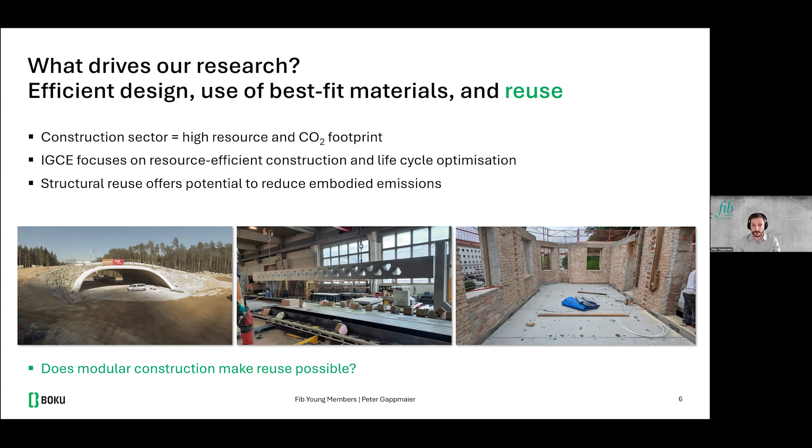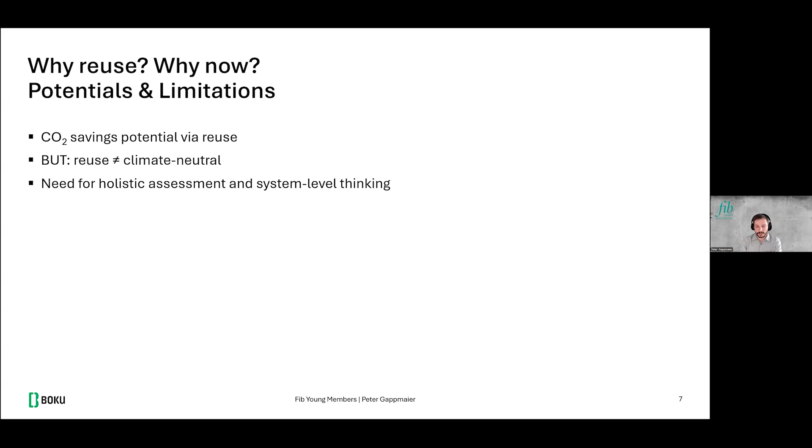And why did we come up with this idea? Since we had a survey going on and also an LCA on different ceiling slab systems, columns, and floor systems. And there we found that reuse potential is super high compared with recycling. So the GWP goes way further down if you reuse building components. But you have to say, it's not climate neutral. You can't compare, you will never get this.

So there are a lot of topics we can address. So also CO2 storage will be a thing, since also if you reuse, you already need a certain amount of new concrete to fix stuff, etc. But that's something that maybe can also be solved.

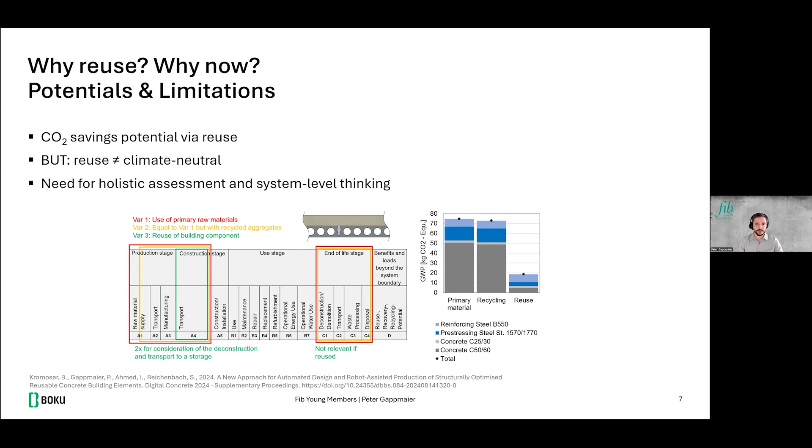But as you can see here, the potential is kind of huge, I would say. And that said, it needs a holistic analysis of all building components and the construction industry. So therefore, we had a survey going on with 7 stakeholders where they were asked up to 35 questions.

And we had over 100 participants, as you can see here, from manufacturers up to architects to demolition companies, etc. The topics have been about quality of construction components, flexibility, sustainability, logistics, connection types, reuse potential, etc.

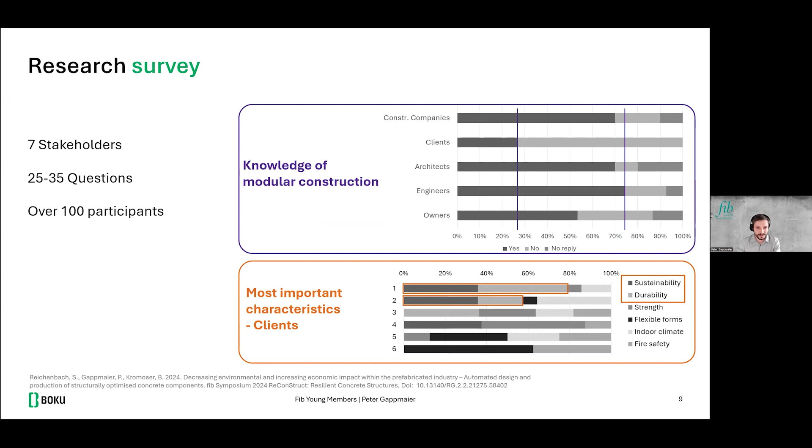And there were some interesting outputs. The knowledge of modular construction was kind of okay or high, I would say. But clients, yeah, how should they? They weren't aware of it. But on the other hand, clients' first and second ranking was sustainability and durability of the building stock. So it's not something only we are doing in research. Clients also want this to happen.

For the drawbacks of reuse, you might think architects would say the design limitation could be there, they could be angry about it, but no, they also said logistics effort. And as we then had conversations with them, they told us, sometimes you need some boundary conditions you can work within, and then you sometimes get more creative if you have certain boundary conditions.

And so they said, and also demolition companies, that screw connections would be the best for them because it's more simple to rebuild the building and build up the building. Even if the building is not 100% reusable, as you've seen the potential beforehand, it's also probably worth it to have a certain amount of building components reusable.

So our tasks, I would like to show you more from my personal work: how we produce them, how we can automate them, since automation is super lacking in the construction industry, especially from my point of view, what I've seen in Central Europe more or less, and resource saving on several levels. So we can save a lot in the design at least, and also have the automation potential for the labor shortage, the maintenance, etc.

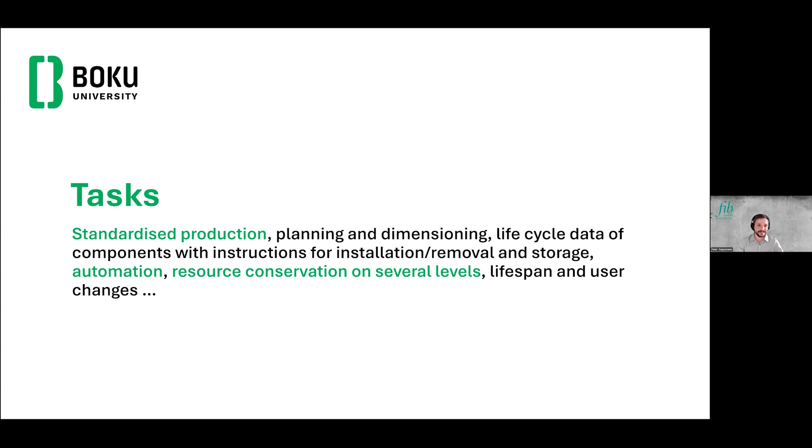You can just produce more stable, and also for your health. Don't know how many of you have been in prefab construction companies and working there. Yeah, it's not that easy, I would say, doing this over several years.

So that's why I came up with the idea of a manufacturing execution system where we use robots to produce these components. But by just producing these components, as we have seen from the survey, logistics will be affecting these components. So that all has to be gathered together in a database where it can be stored.

And this is something very important: to maintain these databases, the information of your products. If they're reused, you can pass them to the next building. Since if you lose this data, this information of these components, we are at the point where we are now. People could reuse certain components, but since they don't know what material it is, what steel is in there, who produced it, sometimes this data gets lost, and so they are not capable of reusing them. And getting this data from already existing older components is very hard. So this is a certain point.

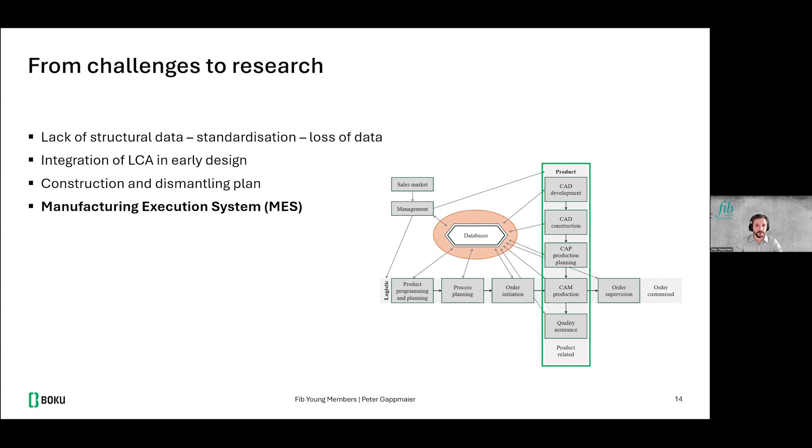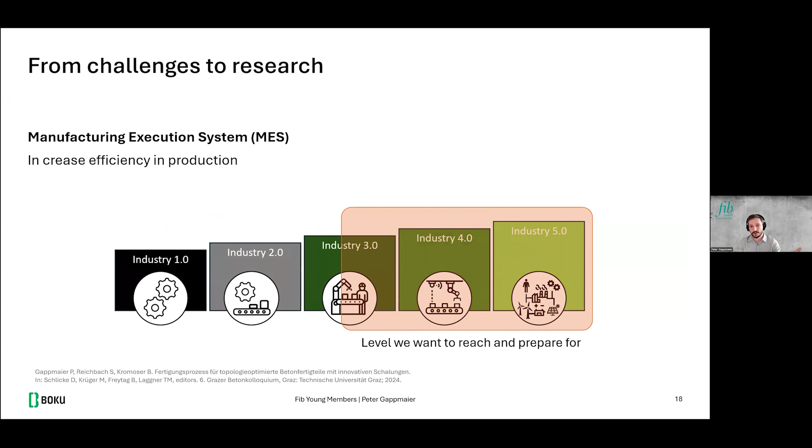That's why we think of the actual state of practice. We would like to have a system that goes up to Industry 4.0 and 5.0, or at least be ready to have no boundary conditions that are not applicable for Industry 5.0. So for prefab, you have several stages with a formwork table that goes through standard shuttering, individual shuttering, placing reinforcement, concreting, you name it. And we would like to combine all these steps, doing this task with one robot in a production cell. So it's like a modular production cell.

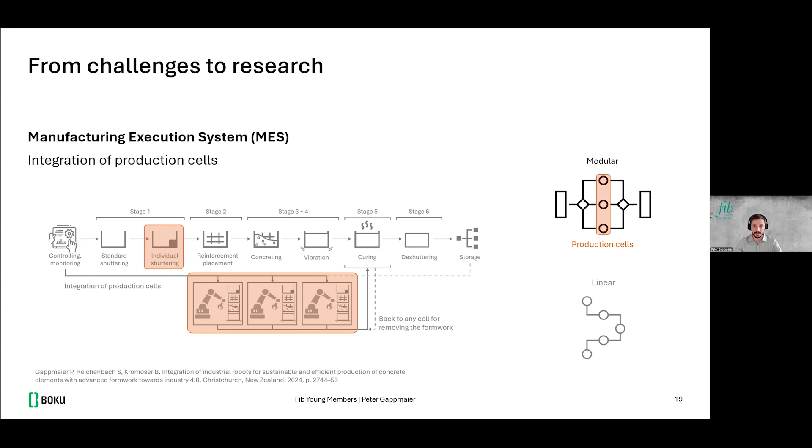Each robot has its own cell where you produce your components, and afterwards they go in the curing chamber and can be de-shuttered in any other production cell. So it's also way easier for maintenance, it's plannable, and since we have a full digital production chain, you can also simulate this and have a nicer process overall. It's more effective, productivity would increase. This is compared to a linear process where you have bottlenecks, and if something goes badly, the whole production just stands still.

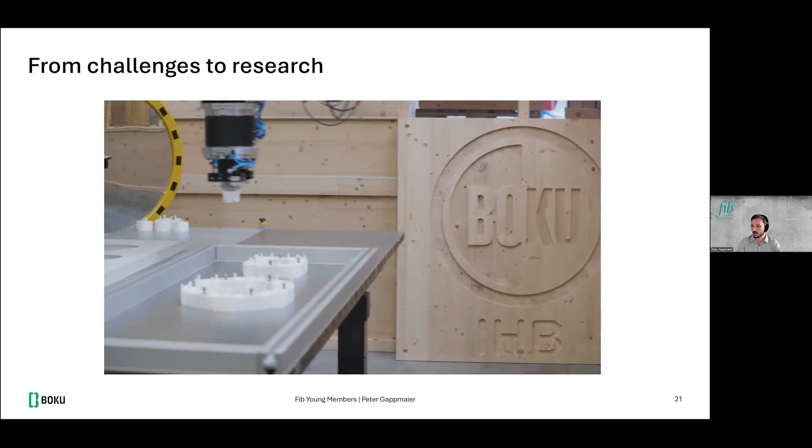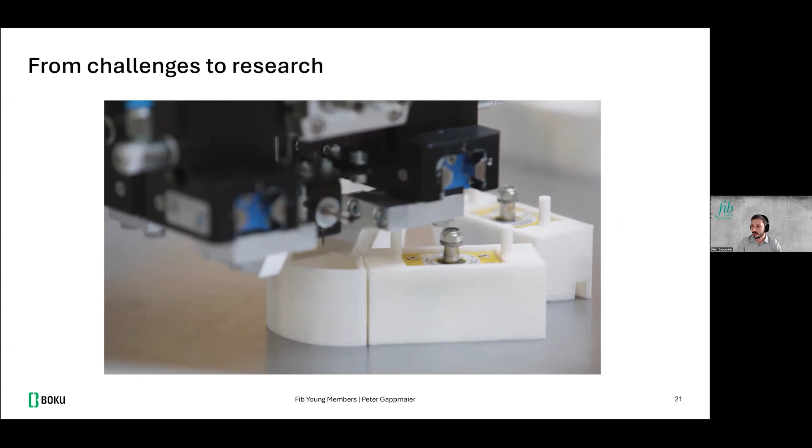Here are some insights from my tests I was doing with our robot, with my formwork system. As you can see here, it's fully automated at the moment. The first tests are going up. And in the end, I show you a bit of an older video, but you see how this formwork system is performing. In the back, you can see an already cast concrete beam. And on the next slide, I can show you how we scaled it up to an 8-meter full cast beam that will also be implemented this year, hopefully, in our new robot lab.

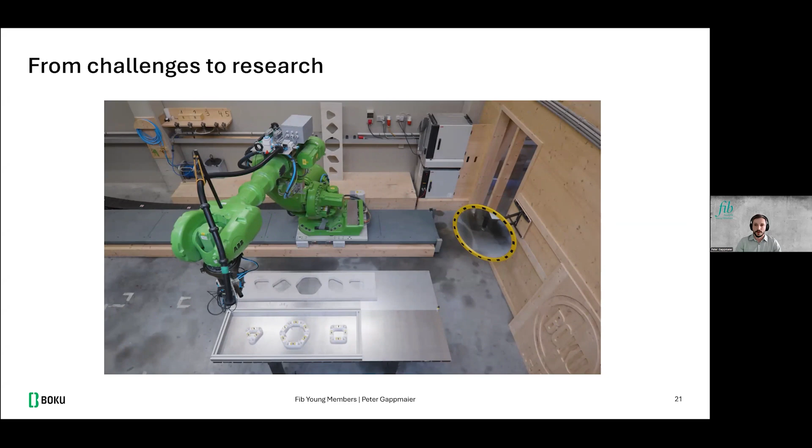So these are the older stages from placing, and then also de-shuttering automatically with the robot. So that's the focus from my side. Therefore, we built up a digital twin where we can gather all the data on energy loss, energy savings, etc., from the robots' movement. And as you can see here on the right-hand side, that's a full cast 8-meter beam, with a reduction of 22% of concrete and some steel because it's a truss configuration.

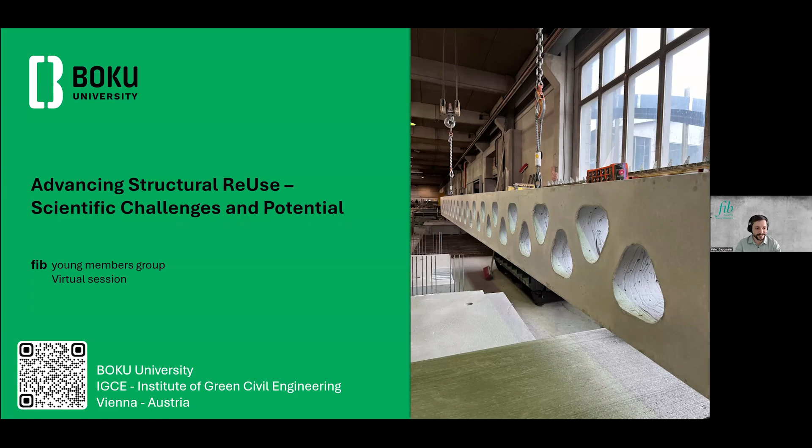The talk today is titled Risk-Informed Decision Making for Resilient Transport Infrastructure Systems. This presentation will deal mostly with the aging of transport infrastructure, environmental degradation, but also the rise of extreme events. Monica's work will explore and present an integrated framework for managing transport infrastructure using a risk-informed approach that combines Bayesian probabilistic modeling to simulate particularly flood events and uncertainties with machine learning techniques. The outcome of her research is a framework that provides a robust decision support tool for enhancing transport infrastructure resilience in the face of increasing hazards and limited resources.

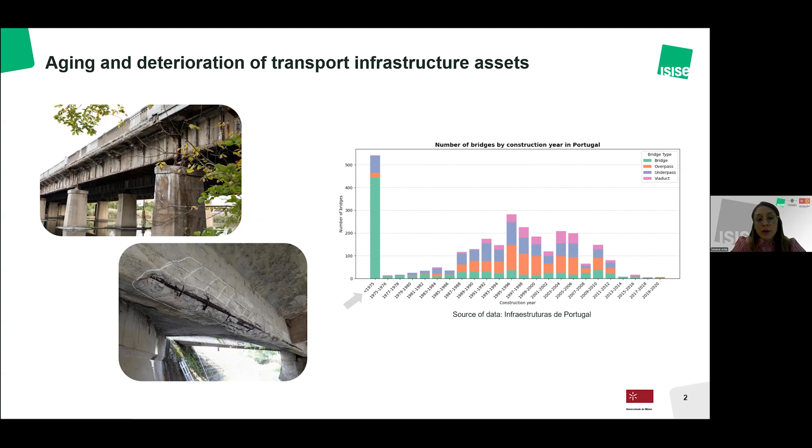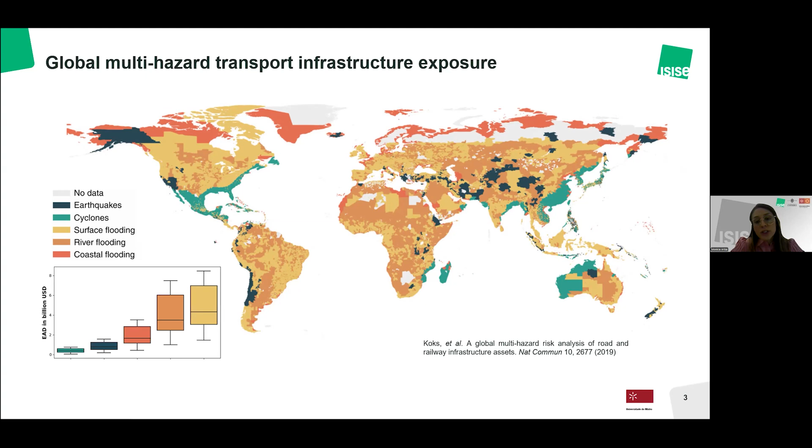So due to this reason, we are facing increased repair and replacement needs, and this is also happening under budgetary constraints. In addition, depending on their geographical location, the transport infrastructure is also exposed to one or several natural hazards, as depicted in this map. And this exposure, in combination with the inherent vulnerability of infrastructures, has led in the past to large economic losses, with flooding causing the largest ones, as shown in the box plot. So all of these challenges are exacerbated by climate change effects, which may increase, for example, the degradation rates of infrastructures and also the frequency and intensity of climate-related hazards.

So to face this problem, the concept of risk has long been used for decision support. However, understanding the risks in these infrastructure systems is still a challenging task. And this is mainly because there is a chain of interrelated events that need to be modeled to quantify the risks. And this requires multidisciplinary research, which is happening at different spatial scales. So this begins with the spatiotemporal modeling of the hazard, the modeling of the performance of different interconnected infrastructure assets, then the modeling of the transportation functionality loss in the case of failure of these assets, and finally the estimation of the socioeconomic impacts resulting from this functionality loss.

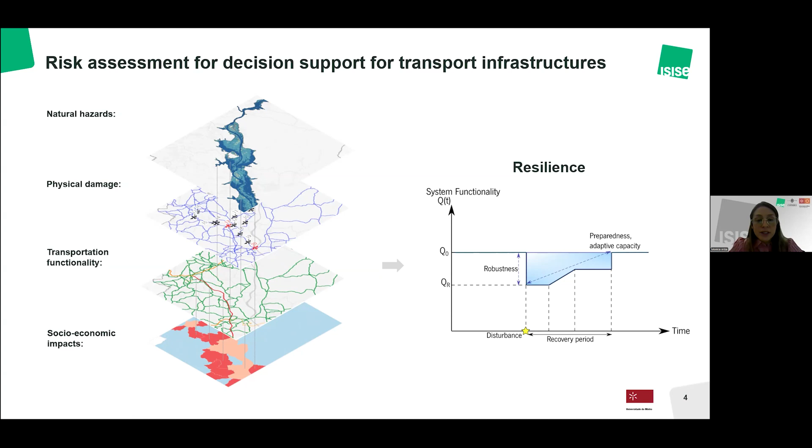And beyond the concept of risk, resilience has emerged in recent years as a key concept for managing infrastructure systems. So resilience is related to how robust our system is to withstand disruptive events, and how this loss of functionality is recovered after the event, which depends on many characteristics, including how prepared the system is and its adaptive capacity.

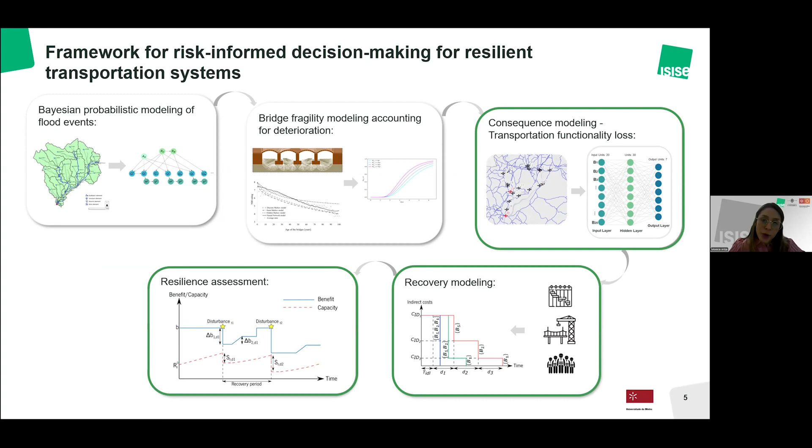So the overall proposed framework to quantify the risks and support decision-making for resilient transport systems is summarized here in this slide through the different components shown in the flowchart. The first component consists of the implementation of Bayesian probabilistic modeling of flooding events acting on the transport infrastructure. The second component is the modeling of the bridge fragility, accounting for the deterioration effects. The third component is the consequence modeling part, with a focus on the losses due to traffic functionality. The fourth component is the modeling of the optimal recovery after the disruptive event. And the last component is the resilience assessment to support the decision-making process. Since today I'm doing a short presentation about this framework, I'm going to focus on the last three components.

So the first component I will address, which is the consequence modeling, we can separate into direct and indirect consequences. The direct consequences can be quantified in a more straightforward way, simply as a function of the physical damage that the infrastructure suffers after the extreme event, and they are related to the repair and rebuilding costs. However, the indirect consequences, since they are related to the loss of functionality in the system, require a more detailed examination.

So in this study, the indirect consequences that we address are those related to rerouting and the loss of connectivity, in terms of the economic consequences to users, the environmental consequences in terms of CO2 emissions, and the consequences to health in terms of fatalities due to traffic congestion. These types of consequences are particularly relevant when the transportation network is not redundant, and, for example, the failure of one infrastructure asset results in very prolonged detours or loss of connectivity. This is the case in the region of Santarém in Portugal, which was the case study depicted in the figure.

And this is located along the Tagus River, and it has been affected by severe flood events in the past that have led to the isolation of small villages and also several road closures that can extend for one or more weeks. So essentially, during normal conditions, all users of the transportation system are minimizing their travel costs and choosing the route that minimizes their total travel time.

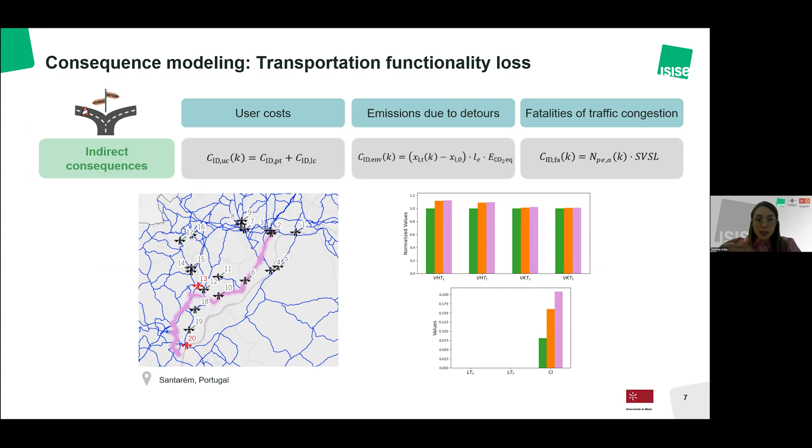Moreover, if we have more than one bridge failure, for example, now the failure of Bridge 20 as well, we can have different bridge failure scenarios that we need to model, and we need to understand the different traffic metrics in order to compute the indirect consequences of each of these scenarios. So this process is time consuming. So to assist in this task, a neural network model was trained to predict the outputs from the traffic model for a large number of different bridge damage network scenarios.

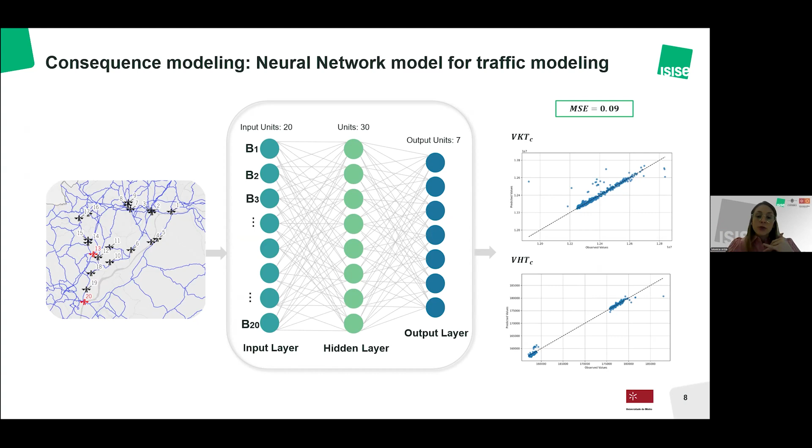So the component of recovery modeling basically aims to support the recovery prioritization to minimize the consequences. Essentially, if we have a given damage network scenario, the recovery process can vary significantly depending on several factors, and this will affect the total accumulated indirect costs. So therefore, the idea of the methodology is to determine the reconstruction order that minimizes the total indirect costs. And this process is achieved by iteratively comparing for each bridge how it decreases the indirect costs given the damage network scenario and selecting the one that minimizes the indirect costs the most. And to support this process, the neural network model is used again here to predict the traffic metrics. And the output of the model is then the sequence of repair that progressively reduces the indirect costs.

However, there are other factors that may further reduce the indirect cost by accelerating the recovery process through simultaneous bridge repairs, for instance, or having shorter restoration times. And these factors are related to the system preparedness to react and recover from the disruptive events. And they can be described by three main parameters: the idle time, the repair time, and the number of construction crews that are available to perform those restoration activities. So for instance, if a system has a low preparedness, then it means that they will have limited resources for conducting the restorations. So they will take a long time to initiate, which would be the idle time. Then they will take long repair times. And then they will have a limited number of construction crews working concurrently, which will increase the total recovery time.

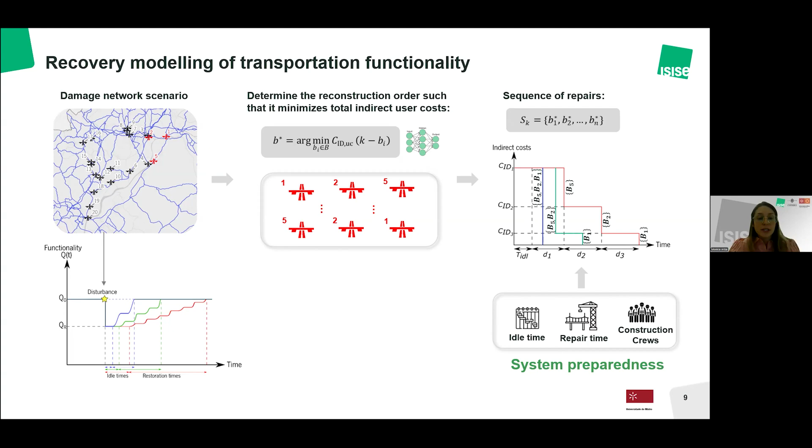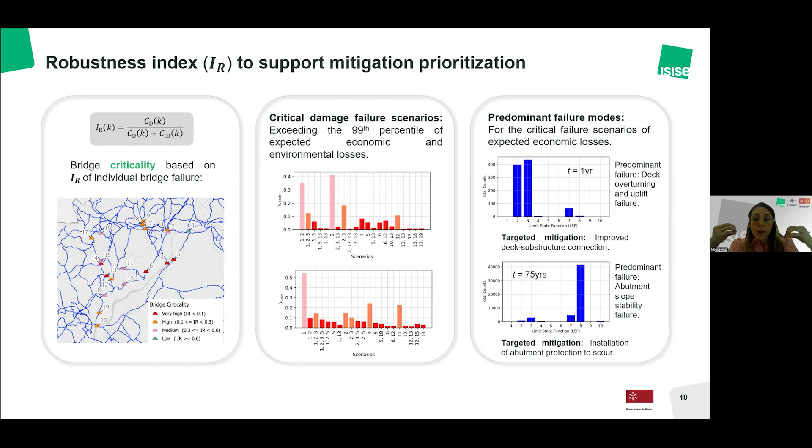And it's also possible to identify through this framework the co-occurrence of bridge failures that are contributing the most to the overall expected consequences and that have very poor robustness. And finally, it's also possible to investigate which are the predominant failure modes for the identified critical scenarios. And in this sense, we can target the mitigation strategies to the specific failure modes and the critical bridges.

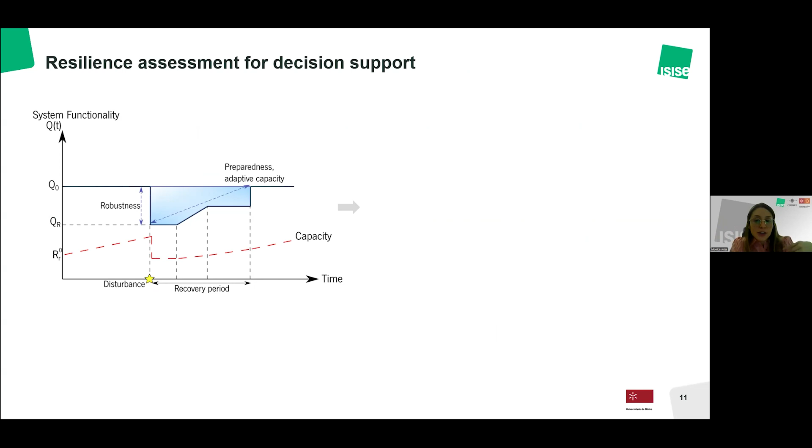And the last component of the framework is the integration of resilience for decision support. The figure displays the typical resilience curve that focuses on the functionality of the system and how it recovers. However, it is also informative to look at the generation of the system's capacity to reestablish that functionality. This capacity develops over time, and it comes from the benefits that the transportation system is providing.

Under this concept, resilience can be evaluated as a capacity demand problem, where the economic capacity, depicted in red, can be considered as a reserve, like a percentage of the benefit that the system is generating over time, shown in blue. When we have a disturbance, there is an economic demand that will reduce my economic reserve, shown as the drop in the red curve. This demand is like the reconstruction expenses of the failed infrastructures at the time of the disturbance event.

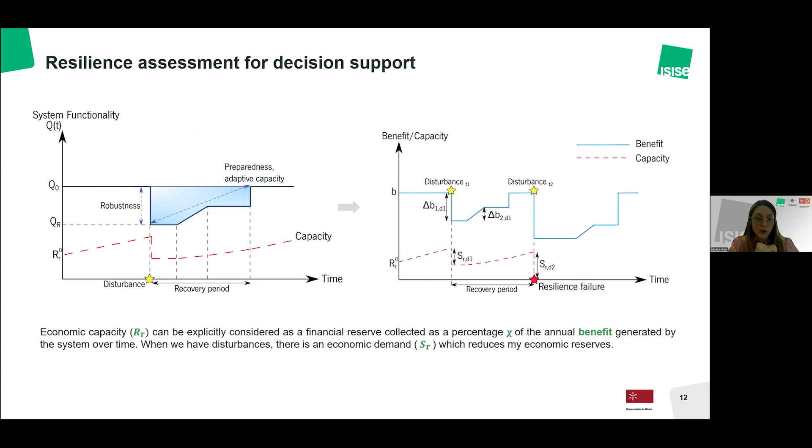This concept of probability of resilience failure can be used to compare different decision alternatives for managing infrastructures. For instance, if we take into account decisions about the annual reliability level of bridges, decisions on maintenance investments, and decisions on the percentage of benefits we should save for reconstruction and recovery, and assume three levels—low, moderate, and high—for each of these decisions, we can do different combinations between these three decision alternatives and investigate their effect on the annual probability of resilience failure.

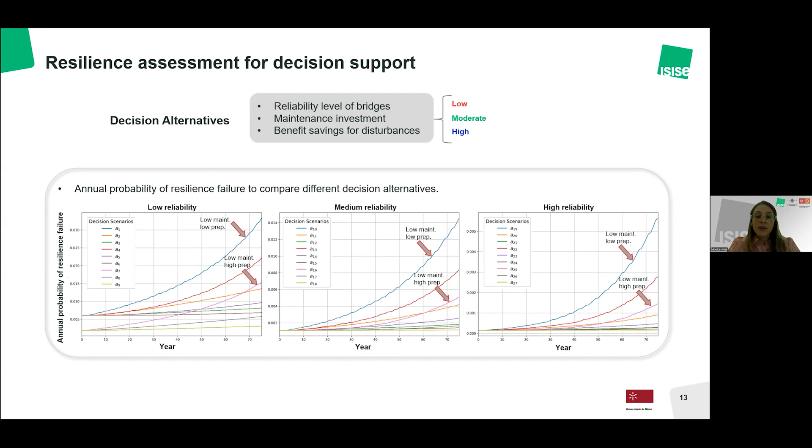The results are presented in the figures, and they indicate that, for example, having a low maintenance level has a significant effect on the annual increase of resilience failure probability—these are the highest levels. While high levels of benefit savings decrease the failure probability, it's also shown that having very poor maintenance has a high effect that can even diminish the effect of having savings for recovery.

To conclude this presentation, I have shown how the application of machine learning techniques can help reduce the computational costs required to estimate the consequences while maintaining a high level of accuracy. This facilitates the quantification of risk and also the identification of the optimal sequence of repairs.

Also, the framework enables a better understanding of which failure scenarios are more critical—which are the critical infrastructures and the critical failure modes. And finally, it's also shown how resilience concepts can be integrated into the decision-making framework through the concept of resilience failure probability, which allows comparison of different decision alternatives.

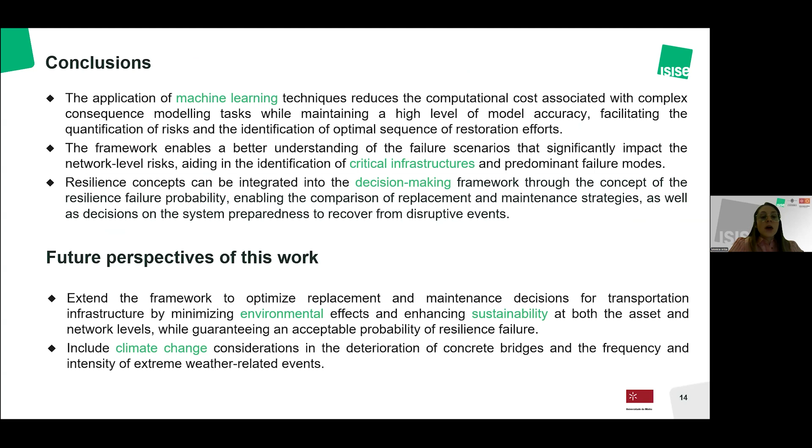Regarding future perspectives of this work, and given the topic of this webinar, the idea would be to extend this framework to optimize replacement and maintenance decisions for transport infrastructures by minimizing environmental effects and enhancing sustainability at both the asset and network level, while guaranteeing an acceptable probability of resilience failure—finding that trade-off between sustainability and resilience, and also including climate change considerations in the deterioration of concrete bridges, and in the frequency and intensity of extreme weather-related events.

So thank you for your attention.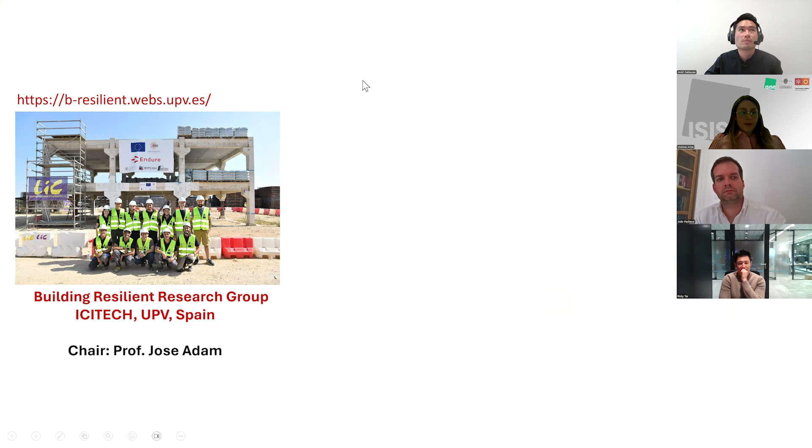We mostly work on two main research topics: robustness of bridges and buildings, and structural health monitoring and assessment for infrastructures. Currently our team is quite big, with 5 postdocs and about 8 or 9 PhD students working on many different projects.

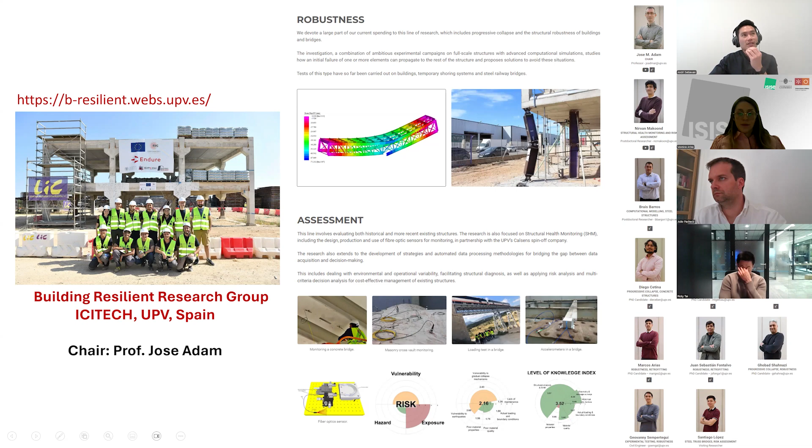The one I'm presenting today is specifically about this ERC project. Just to give an overview, I'd say we are quite experimentalist and we like to do large scale testing. We've done many experimental tests in the past.

For example, here we did some masonry arch vault testing, a type of structural system mostly adopted for Gothic cathedrals in Europe. And here in the middle, we had the opportunity to test a real bridge that is 100 years old. This bridge was extracted from the field because they wanted to replace it with a new one, so we had the opportunity to test this 20-meter span bridge.

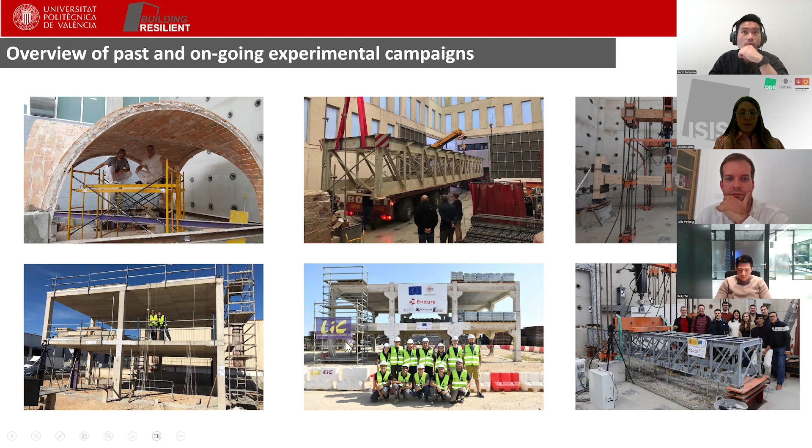We cut some pieces of this bridge and did cyclic, fatigue testing on it. Then another one on timber structures, where we evaluated the robustness of timber structures. The two below are full-scale buildings, on flat slabs and precast, and this is the scaled-down version of the bridge you saw in the middle.

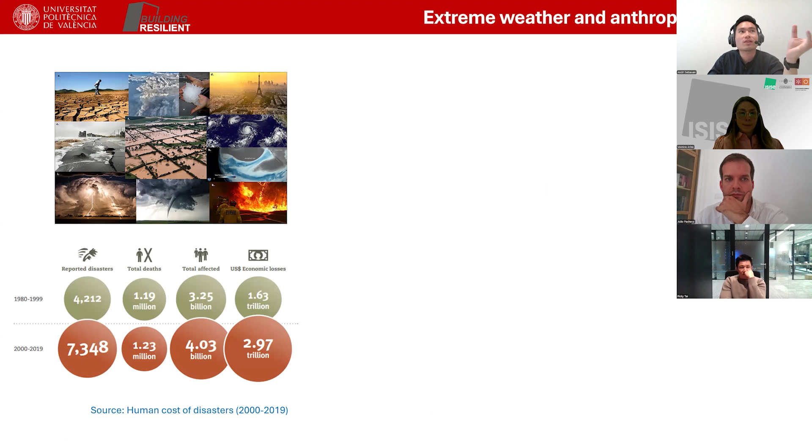I'll be quite short on the background, already discussed by the two previous presenters. We have an increase of extreme events that cause more and more losses in terms of casualties, but also economic losses. At the same time, this is the newest Global Risks Report 2024 produced by the World Economic Forum.

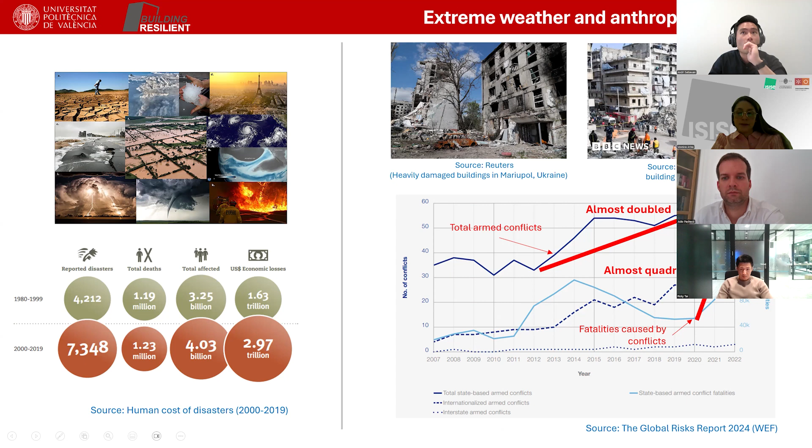We can see total armed conflicts, or geopolitical tension, causing this. The total armed conflicts almost doubled during the last decade, and the fatalities caused by these conflicts almost quadrupled, increasing 4 times.

These extreme weather and anthropogenic hazards can typically lead to damages in structures, and depending on how robust a system is, this damage can be localized. But in the worst case scenario, this local damage can propagate to the rest of the system, creating a domino effect that we call progressive collapse.

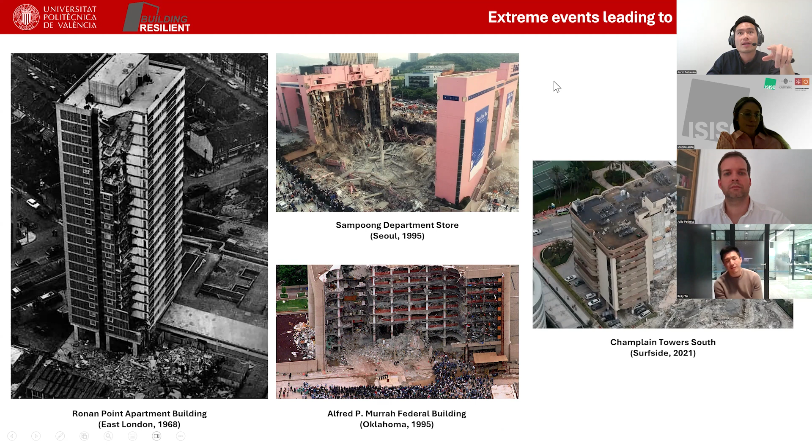We've seen this on many occasions in the past. One of the first infamous ones was Ronan Point in London in 1968, the first incident that became an alarm for the engineering community to work on robustness guidelines. Then another incident in Seoul, the Sampoong department store, and in the same year the terrorist bombing attack in Oklahoma. The most recent one was Champlain Towers South, which happened 4 years ago.

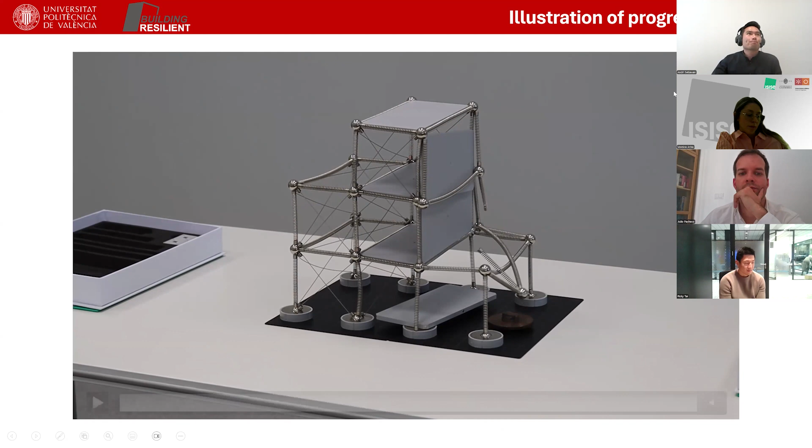Okay, so I'm going to start by explaining what we use in current design approach. What we use in current design approach is relying on redundancy and continuity. The idea is very logical and makes sense, no?

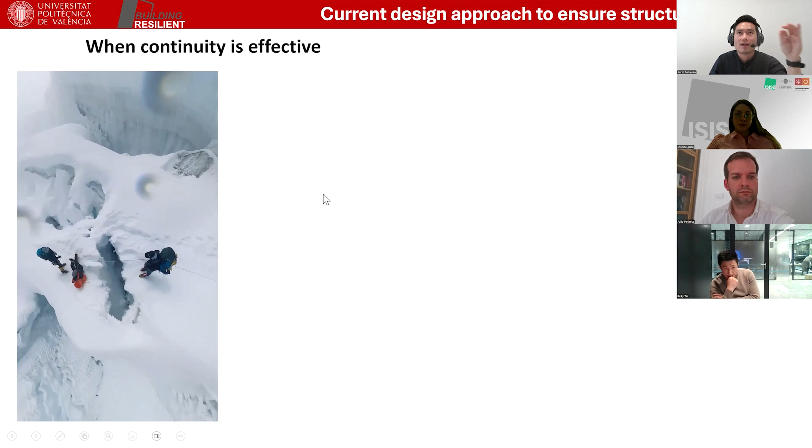This philosophy has been proven effective in many situations. This is a building in New York just beside the World Trade Center during 9/11, and you can see that although the facade was completely destroyed, thanks to the continuity, you can prevent major collapses. Also here, the bottom one was a building damaged by missiles during the war in Ukraine, and you can see the building survives with these new alternative load paths that can develop.

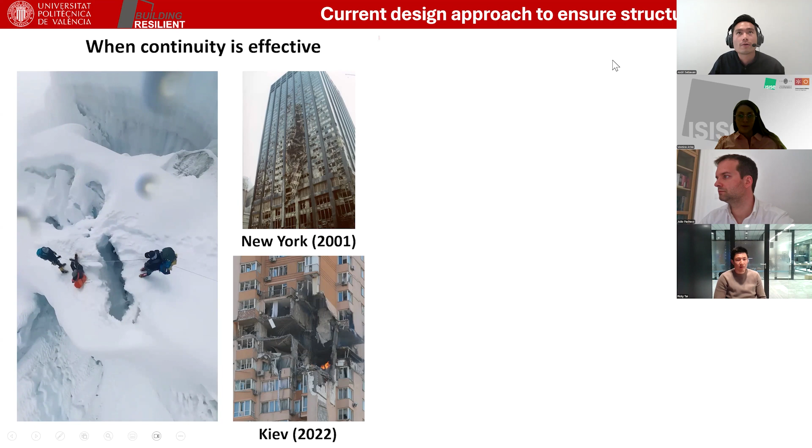But we start this project by criticizing that this philosophy doesn't always work as we want. Imagine you now walk on Mount Everest and your group has, say, 20 people, and it's not just one person that falls down the cliff, but imagine 5 or 10 people - half of the group - falls down. What happens is, through this continuity, you pull the rest of the people, and all of them fall down. So instead of having 10 fall, you basically pull all 20.

In this scenario, of course, this is the worst case scenario that we don't want to have in our group. But in this worst case scenario, probably the only solution is to cut the rope - you sacrifice some parts in a way, but to save the rest. So it's the same in buildings.

If you have this extensive continuity - this is a video showing building implosion, basically used by people doing demolition - you can see that you just need to put some explosives in the middle of the building, and by the continuity, the collapse can propagate by itself through the whole structure.

We also perform some modeling and we can simulate the same thing. So if parts of the building fall down, actually through this continuity that is supposed to protect your structures, it can create like a boomerang effect, and actually creates a larger collapse.

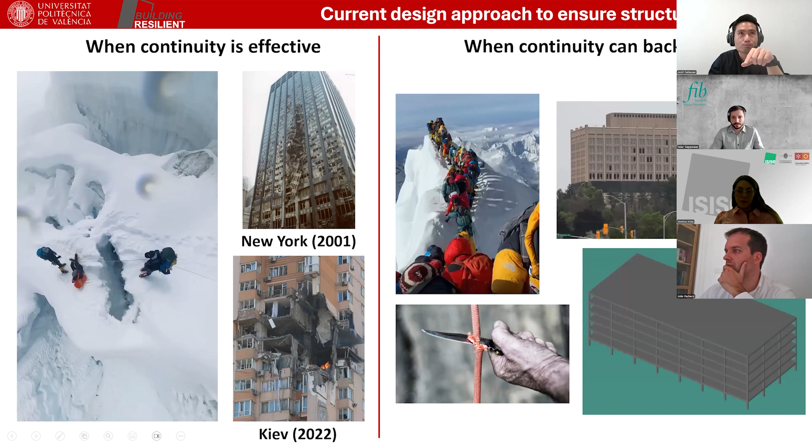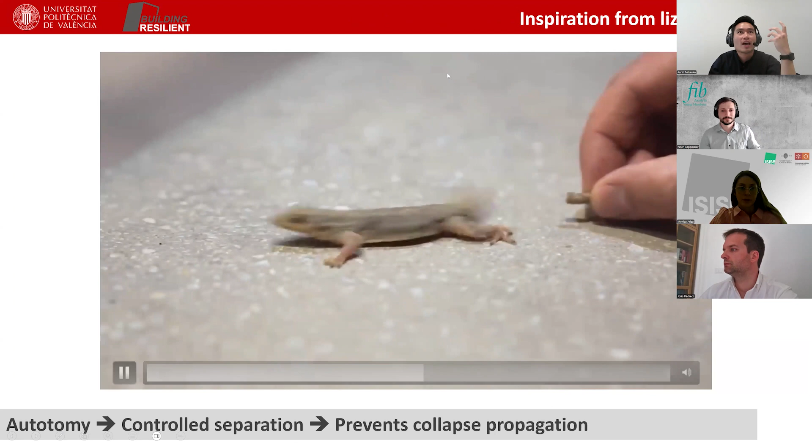So this is the starting point of our project Endure. What we do is try to find inspiration from nature, because nature has been through evolution for thousands of years. We can see in lizards they have the ability, called autotomy, to shed their tails to escape predators. This mechanism is deliberate - it doesn't happen by accident. This mechanism is by design.

I'll show you in the next slide - there's a very nice paper in Science about how lizards actually break their tails. They have special segments between the body and the tail that can be activated when the lizard moves with some degree of freedom. If you just move in one direction, the tail will not break. But to activate the separation, the autotomy, the lizard just needs to make a twisting movement, and the tail will break by itself.

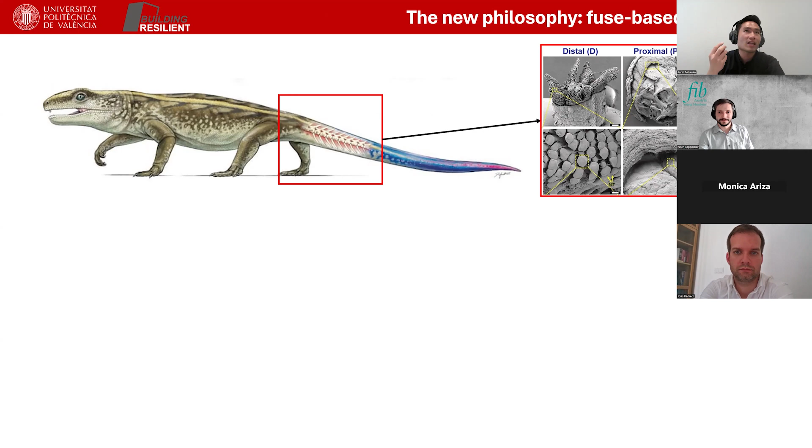What we learn from this is that this mechanism is something you can engineer - it's not something that happens by accident. So what we do is combine two opposing concepts that people always think impossible to combine because they're both extremes: to have continuity, but also segmentation, in the same building system. What I mean is that if there is no extreme event, no significant damage in your structures, you want to remain continuous - you want that continuity because you want structures that are redundant and have the ability to redistribute the load.

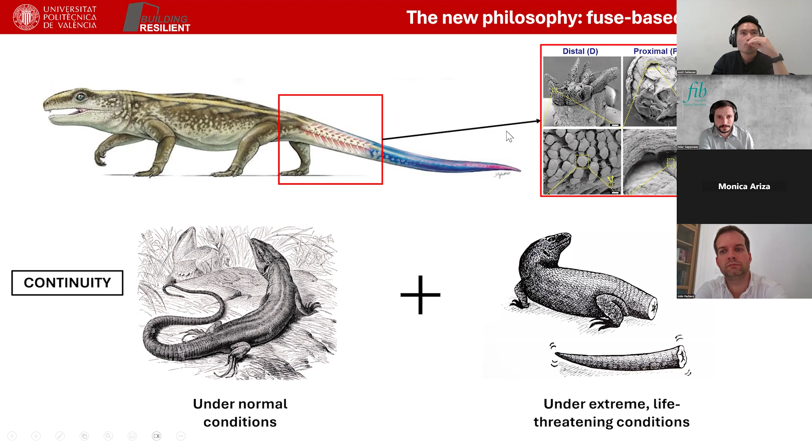But then when there is a worst case scenario, we call it the black swan event, that is very significant or very, let's say, detrimental event with a very low probability of occurrence, we sacrifice some parts of the building to save the rest. So this is what we call fuse-based segmentation that is inspired by lizards.

Of course, we did a lot of simulation, we do a lot of consequence analysis also, but due to the limited time, I'm going just to show you the most interesting part, I would say, which is the validation, right? Because you can have a very beautiful theory, but if it doesn't work in reality, it's useless. So we basically constructed this full-scale building. It is 12 meter by 15 meter in span, 2-story buildings made of precast system.

Initially, we create like two conceptual designs of this building, design H and design C. Design C is basically the original design that is following precisely the conventional robustness design that we have today. And then this is the new proposal that we have, which is called fuse-based segmentation design. And we want to see what happens when these two designs are subjected to the same failure scenarios, right?

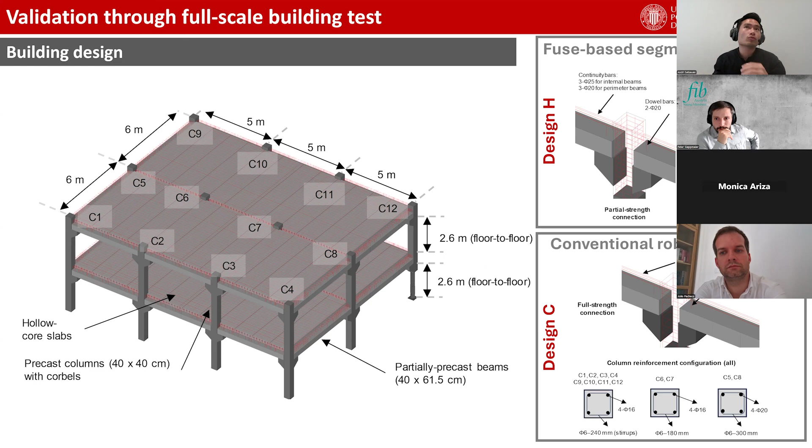So the key here when we design this fuse-based segmentation design is that we design this column and this connection. We use a partial strength connection with dowel bars that basically function like a fuse in an electrical device. So when excessive forces are being transferred from this horizontal floor system to the column, these dowel bars will actually break, and then it will stop the transmission of forces from the floor to the columns. And by just doing this, we can actually achieve the segmentation as in lizard's tail.

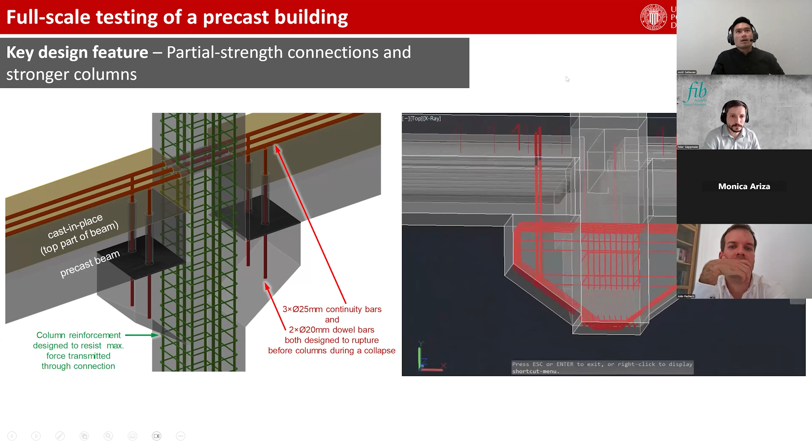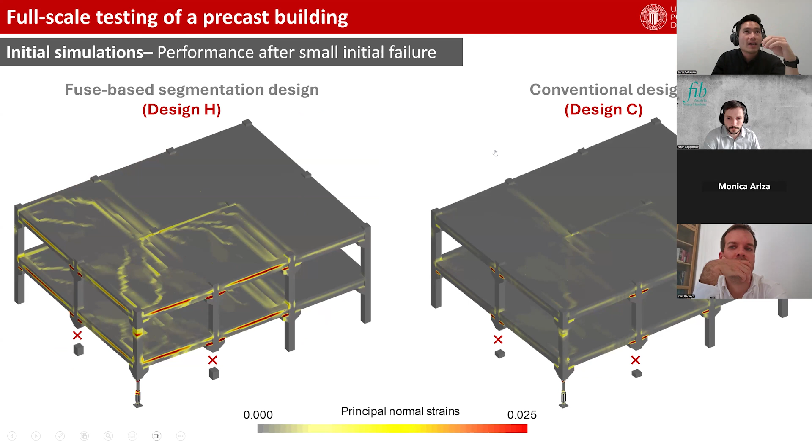So for example, if you have a small failure, these two designs behave more or less similar. They can have redistribution. That's a key factor, because when you introduce this fuse system, you don't want to disturb the ability of the original building to redistribute the load. But then the contrasting outcome happens when you subject this building to a larger failure. So when you subject this to 3 column removal failure, you can see here.

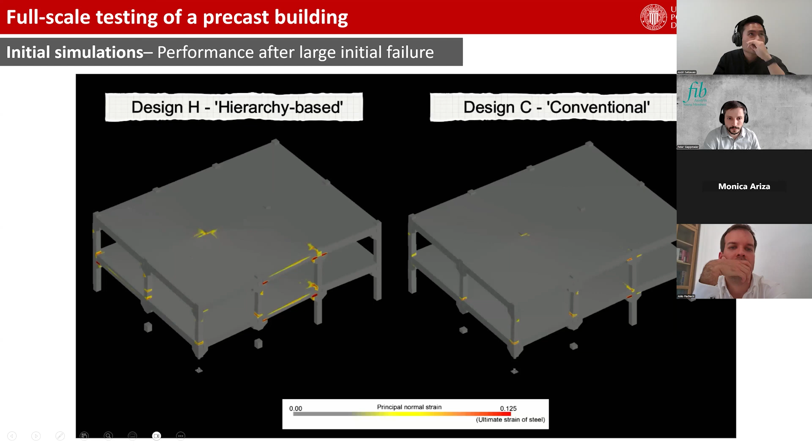So in design H, the failure stops at the border where we engineer. So this is basically the transition between the body and the tail of the lizard. And the conventional design actually propagates the failure. So you can see that buildings that are designed, even with the most updated codes, can actually result in total collapse. So we perform this.

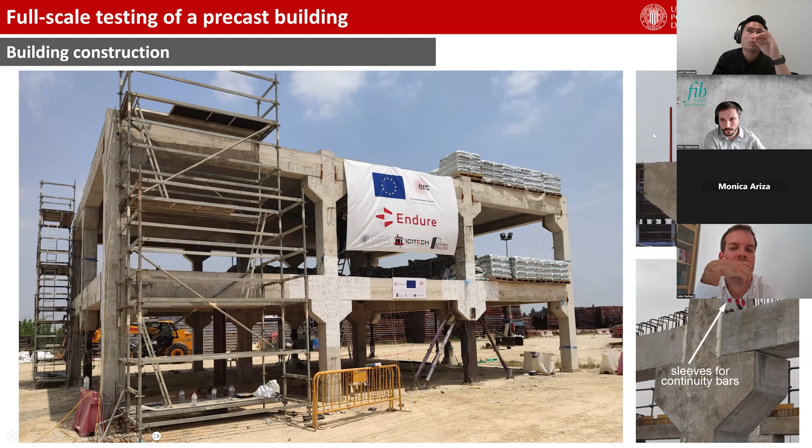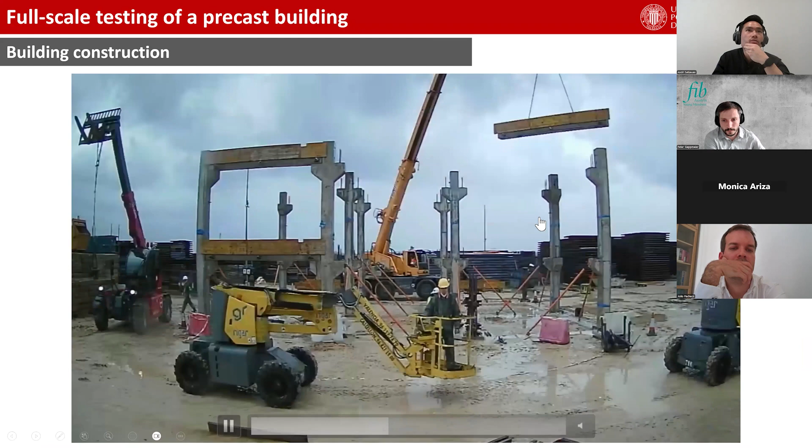And this is the time lapse of the construction of the building. We have our outdoor lab facilities here in Valencia to perform our full-scale testing. This is the erection of the precast columns, and then we continued with the precast part of the beams, and then we have the hollow core slabs, and then we cast the topping all together with the hollow core slabs.

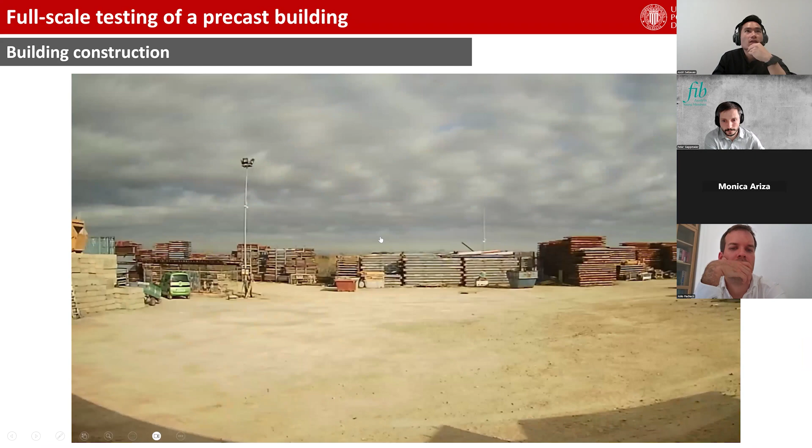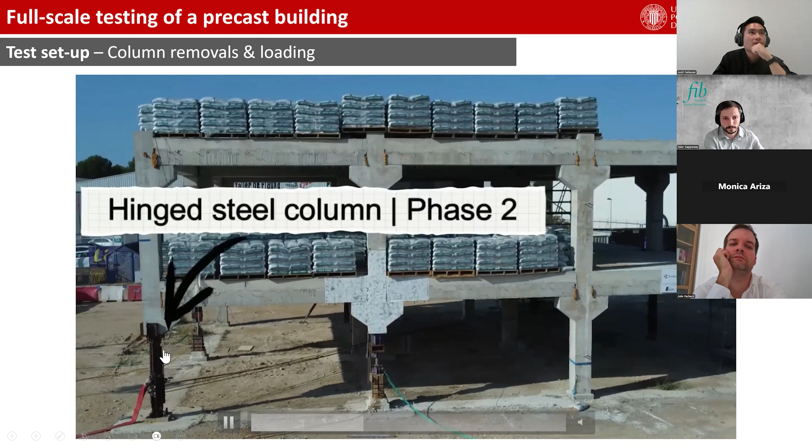And this is, let's say, the boundary condition and the loading protocol that we adopted. You can see here. We put hydraulic jacks here basically to remove the reaction in the column to simulate column failures. And then here we can see all the sandbags. This is the steel column that is basically a three hinge column that can flip and simulate like a dynamic removal in your buildings. And this is the sandbags representing the overloading condition in your buildings.

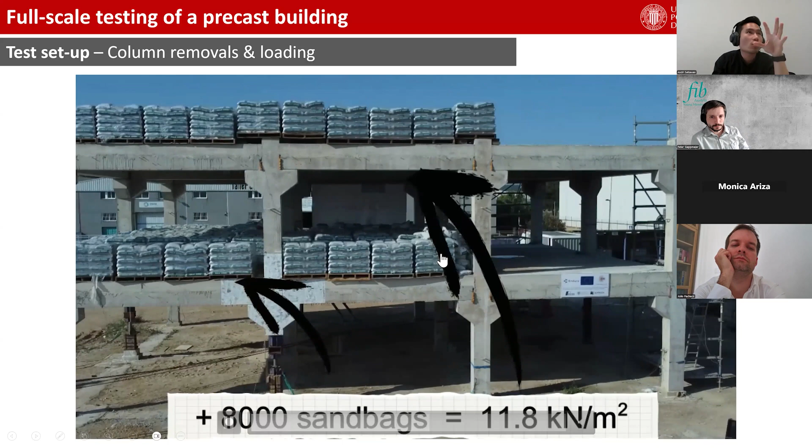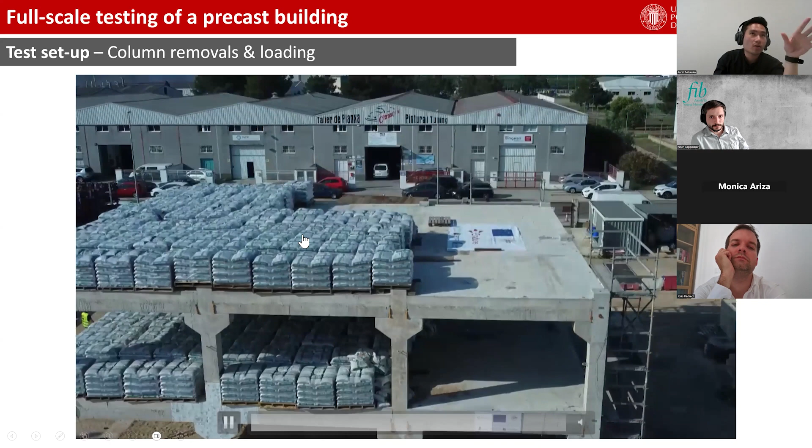And probably you will ask why the other part of the building is unloaded or not loaded at all, because this is the most critical scenario when you have parts of the building loaded and it falls down. Actually, if you have an unloaded part, you will pull everything. So it's more critical to test in this scenario rather than having all the bays loaded. So we perform the test in 2 different stages. This is the first stage. In the first stage, we remove these 2 columns.

So you can see the 2 columns are removed and the building survives. Here, of course, with some damages and cracking. The deflection here is around 6 centimeter or 7 centimeter for 6-meter span. So this is quite significant. And some of the top bars here in the beams are already yielding. But the system is able to redistribute the loads to the surrounding.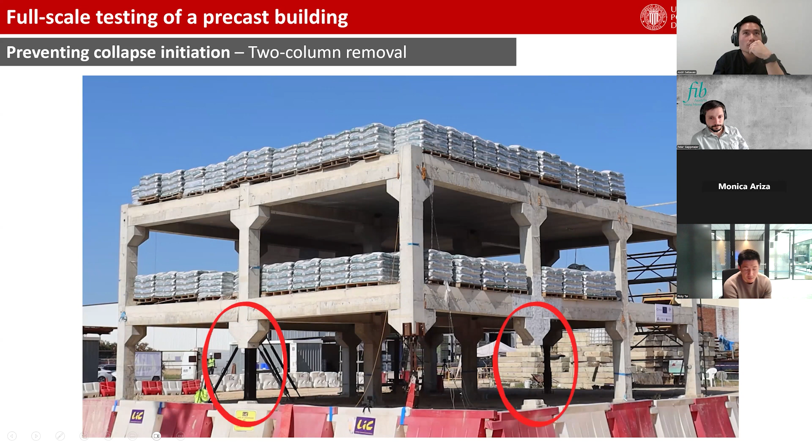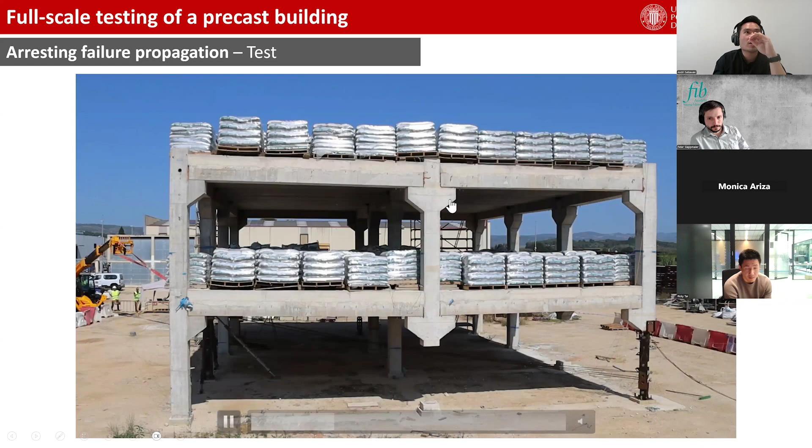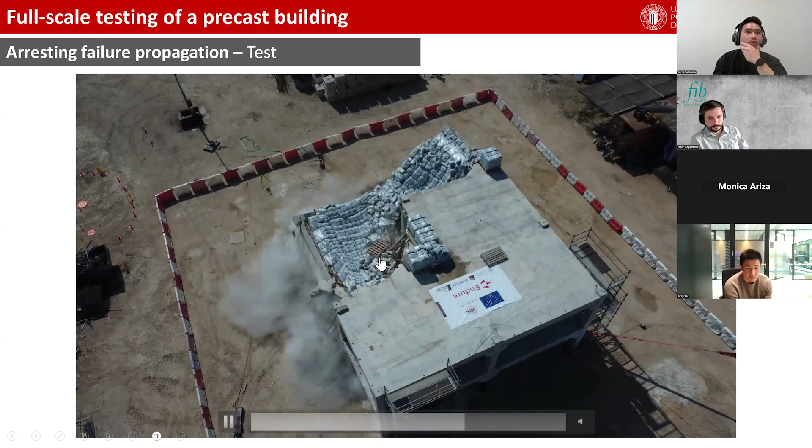So from this first stage, we fully confirm the continuity aspect of the building. But then this is the second part. We trigger the failure here, and then it breaks exactly in the location where we want to have the fracture. So you can see this is the drone view, the aerial view of the buildings. And you can see there is a clear segment border where basically we designed it to segment in that part.

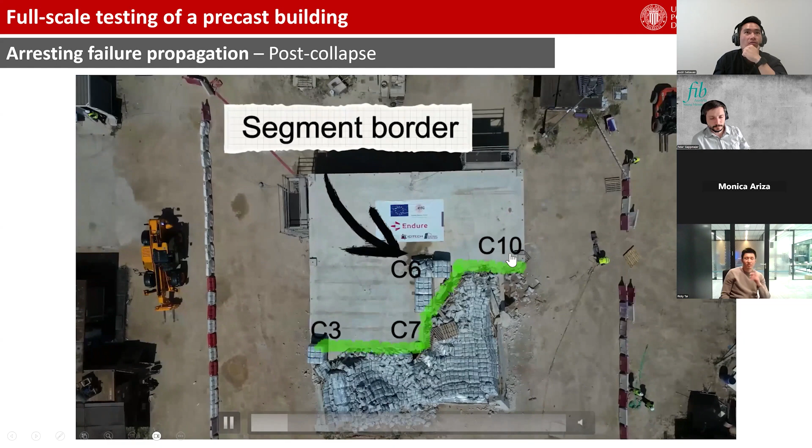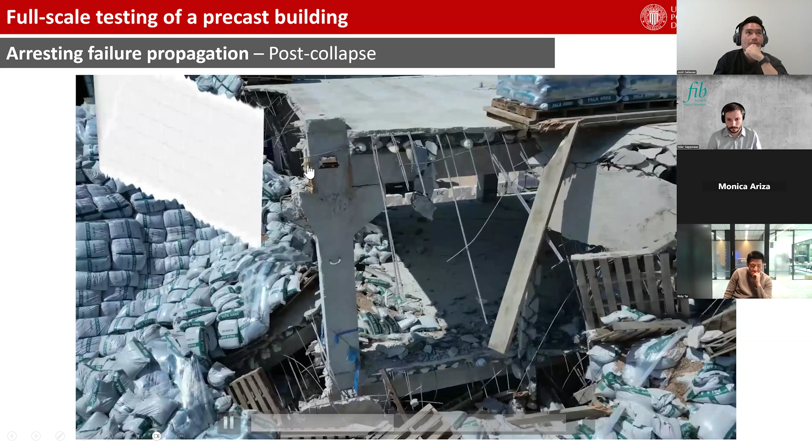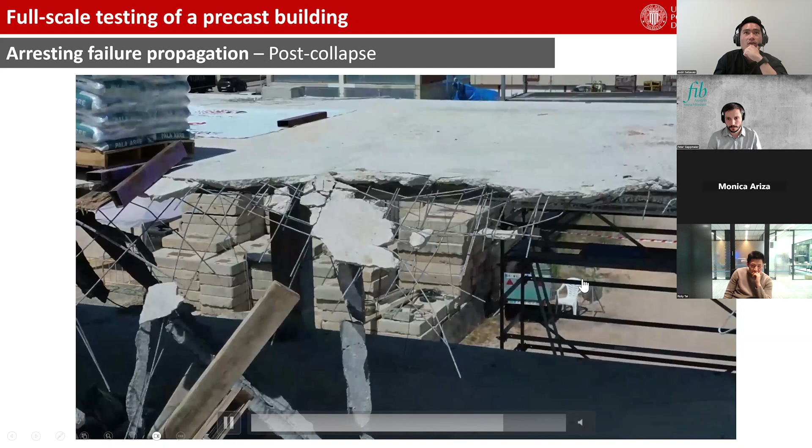And this is the post-collapse inspection. We took some photos from the drone. This is the border that we designed to segment. We engineered this border. And you can see that the dowel and the corbel break and also some slips in the rebar actually allow segmentation. And also this part, you can see that the continuity bars and all the corbels and dowels break here.

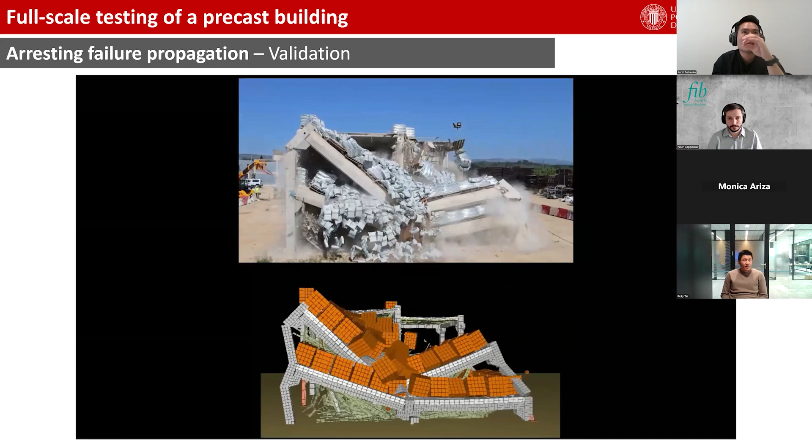And we also performed some simulation, and the simulation was actually done before the test because we need to at least predict and understand how it happens, and we achieved very accurate predictions of the failure. We use the applied element method here to simulate the fracture, impact, and debris. And we can see here that we can achieve a very similar response in terms of the segment border and also the failure from inside.

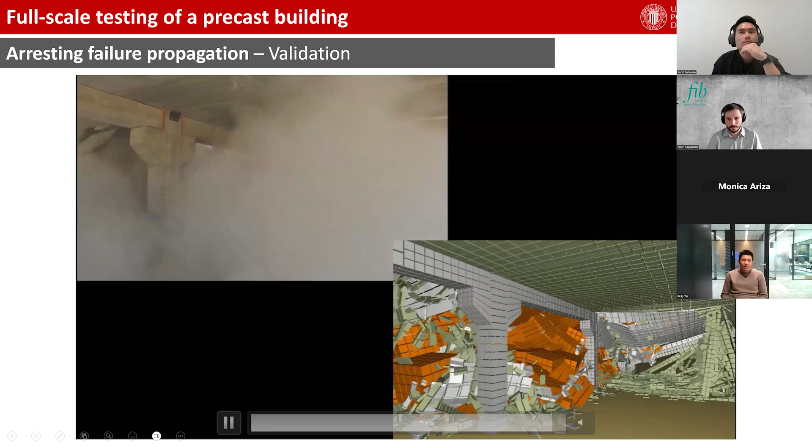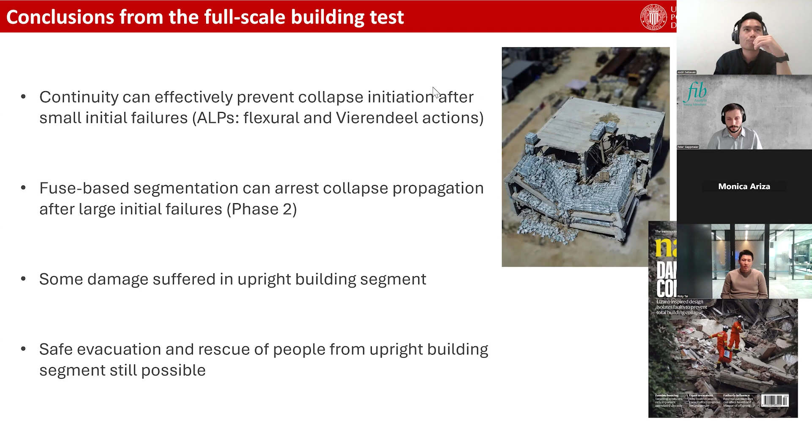So to conclude, this concept combines both continuity and segmentation. In the first phase, we can prove that continuity can happen and prevent failures. But at the same time, when more extreme scenarios happen, the segmentation will take place and actually helps to arrest the collapse propagation. Of course, some damage is suffered in the upright part of the building that is not collapsing. But the most important thing is that you can still perform safe evacuation and rescue of people from the upright building segment.